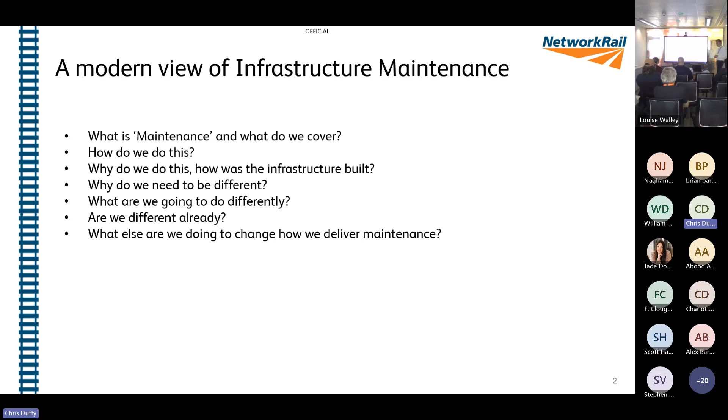So we keep looking forward and saying what we need to do, but let's take a little bit of stock of what it is that we've done already, and what else are we going to do. We've got a really big program of modernising maintenance that's just about to tip over on the 9th of October, and here are just a few principles of that. When I started putting this together, I thought it might be quite useful to talk about where we're at, some of the principles of it, and then come back again in the new year and say what we've actually achieved through modernisation.

So what is maintenance? Maintenance is part of the asset management system. We've got to do a load of things to keep the railway operating - maintenance is a part of it. We've got to do some renewals, but we can't renew everything, we don't have the money to renew everything. So we do some refurbishment - we might change a couple of components, but that can have a massive impact on performance, all the way through to the massive enhancement schemes that change the way we operate the railway. But at the end of the day, for this system to continue to operate, we've got to do some maintenance, and that's something that we look at.

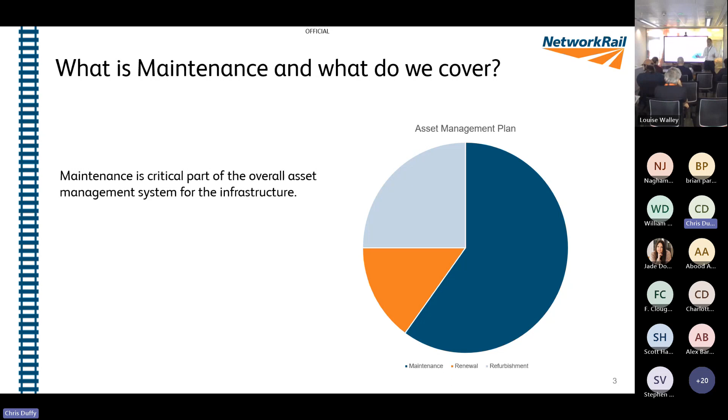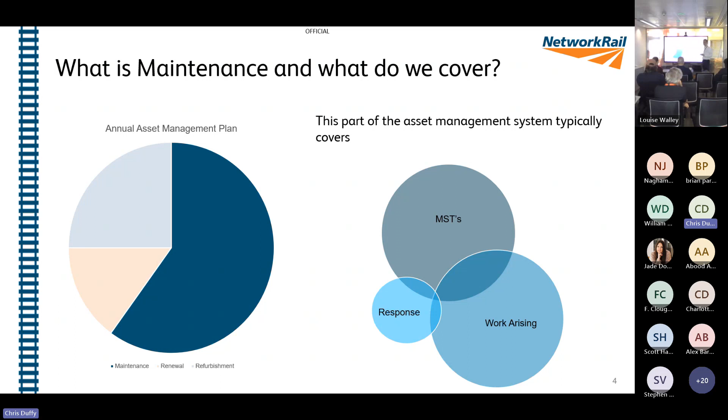So what is maintenance? What do we cover in that maintenance world? As part of that, imagine the maintenance there - we do our MSTs, we do our work arising, and we do our response work. So what are MSTs, I hear you say?

So maintenance schedule tasks - we're mandated to go out and do work on a cyclic frequency that's driven by our standards to say, to get a safe and performing railway, go out and do some work on a cyclic basis. And for all the different disciplines, typically they'll independently say, go out and do this stuff. That contributes about 46% of the work that our direct workforce do. So pretty much half the time we're doing something that's told to us - to get out there, go have a look, go see, go tinker, go clean, go inspect, maybe go change some components. So we do some cyclic replacement, but it's saying on this frequency, go do this stuff.

That stuff that we do will then generate these inspections, generate some work that we might say, actually, we've gone out and done a track patrol, we've done some inspection, and this needs changing. We've got these bolts that are loose - they're always loose, why are they loose? Because they're worn, we're going to go and change those bolts. So we do work arising, and that is then the work that's generated.

It doesn't tell us we have to do it on a specific frequency - these are the things that we find that we think we need to go out there. We will prioritise that, we will fit it into our work banks, and that contributes to just over 40% of the work that we do. So the most significant part of our work is go have a look, and then from that we will have some items that we will plan to change. And disappointingly, 11% of the work that we do is going and fixing faults.

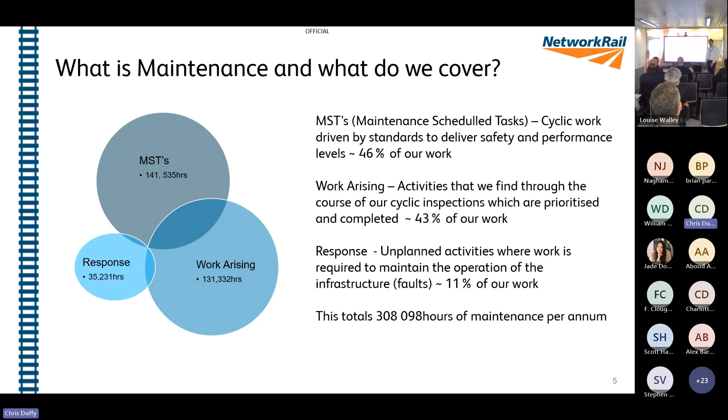So for those of you that aren't from a maintenance background, a little bit of how we do it, getting ourselves into the mind of the section managers, the people who are out there day-to-day planning these works, and the engineers overseeing multiple section managers across that discipline, because we are discipline engineers, we are discipline section managers. So as a former track maintenance engineer, I looked after 3 track section managers, an off-track section, a technical section, rail testing and lubrication, and also welding and grinding.

So what do we need to do? We've covered that with the standards drivers to do our MSTs or the work arising. So we know what we need to do, and we know when we need to do it, and we get a compliance window. So for a task that we would look at doing every year, what happens if we don't do it on day 364? What happens if we do it on day 365, 366, 400? Is it as critical as a task that we should do every 7 or 28 days? We have to do these things more frequently because there's a risk associated with them.

So we know what we need to do. And we have a team of planners who use a system called Ellipse, if anybody's heard of that. That's our work scheduling tool. It's also becoming our master asset register for S&C assets. So we're using this to say what we've got and where we need to go. It's a great tool when we use it effectively.

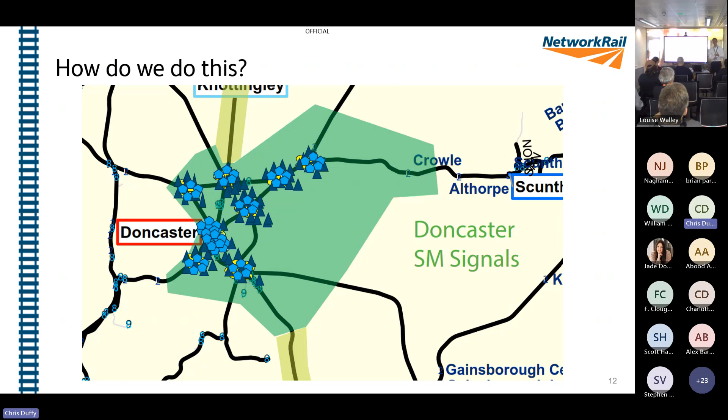And then you think about it - what is the access? How do we do this? This is what we're moving towards with our signal box special instructions, where you can only get in certain places at certain times. If you look at the colours here and here, you can get on the fasts at one time and on the slows at another. So we've now got not just planning by geography - even the line at that place where we're going, we can't get all of it. If we're doing a crossover, we might get on one end of it, but we can't get on the other end because there's trains running on there, and that isn't covered in our signal box special instruction.

So you get to a point now where, with a really heavily congested railway, with the work we need to do - the 308,000 hours of MSTs, work arising, and faults we need to do - because this is all a plan, when your 11% of faults come in, that goes out the window, and you've now got to somehow recover it in one of these access windows with all the other things laid up. It starts to be quite a complex task that the maintenance teams are undertaking. That was just the section manager signalling at Doncaster. We've got 39 section managers on East Coast route who are every day having these thoughts and trying to work out how am I going to deliver this?

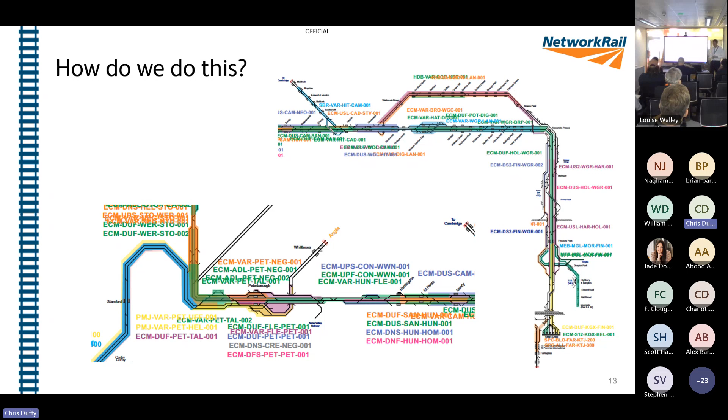So you'll agree? We want to be looking at doing something different, don't we? So have we changed? When I left, remote condition monitoring - as we move into a digital age, and we don't know how long we've been in a digital age, how long have we described ourselves as being in a digital age?

But we've got radar. Anyone in the room know what radar stands for? Anyone remember what the acronym of radar is? Can you, Dan? No, I can't. No, it's got an acronym. I can't remember.

But this is a way that we saw this when we had the presentation for Keadby. Actually, if we can start to instrument our infrastructure in some way, we can start to remove some of these activities, and it's going to tell us what's going on.

We go back to 2019 because things haven't really changed that much. So point heaters, we can see the state of our point heaters if they're turned on or off. Instead of having to go out regularly to check, have they turned themselves on by mistake, or has someone done something to turn them on?

We can start to get alarms that say some of your point heaters are on. That's not good for hot weather management. In winter, if your point heaters are not on, that's not good for running trains on cold mornings.

So it can start to alert us to failures we've got, so we can plan a bit more. If we get an alert at 3 o'clock in the afternoon about some point heaters not working, actually I don't really care right now, I'll go in tonight because it's going to get cold a bit later. We can plan to go in and respond, rather than finding out at 3 o'clock in the morning when the signal tries to swing the points and they aren't working, putting us in a much more reactive position.

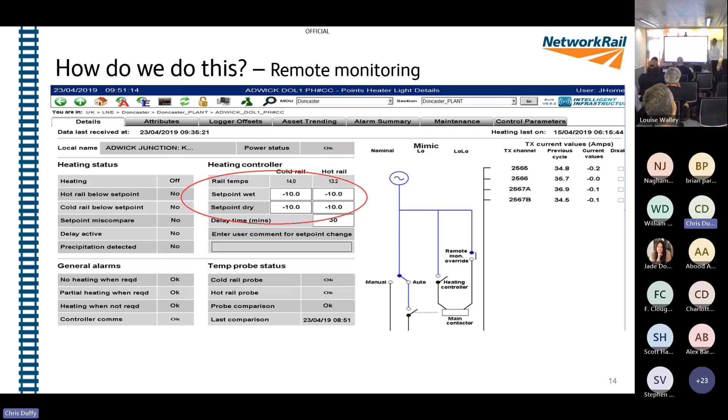So we can start to instrument things, and this is us moving forward. That's a winter example. What about in summer?

Again, remote condition monitoring - how hot is the rail out there? We know how hot the point ends are because we've got probes on them. So what about using that information to find out how hot the track is in summer? We use this technology in winter to know our point heating is working and the temperatures when it'll come on and off. What about using this for more than one area, thinking about rail temperatures?

You can see here someone in July was thinking about rail temperature - great, we've got some red flags. We can set these alerts based on the different critical rail temperatures we've got, because of the asset condition work we've done, and it can start to drive us to respond because the infrastructure is now talking to us. So that's a bit of what we do.

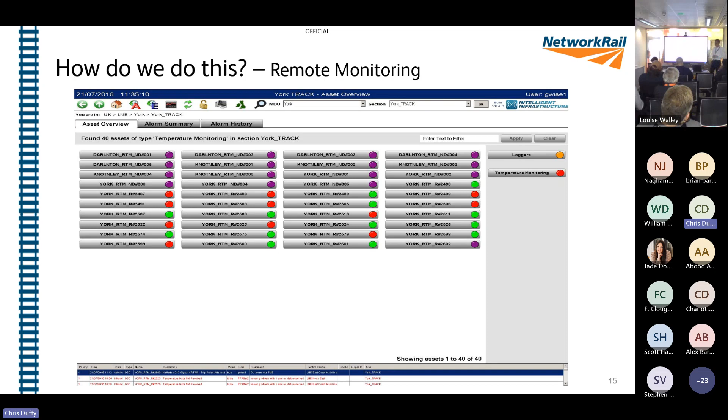Some thoughts from when I left maintenance on what we were looking forward to with a more modern approach. Why do we do maintenance? Why do we do some of it? Hartley Curve up on the Northumberland line - I was involved in the enhancement, and as an ex-maintainer going into an enhancement scheme, I sit and think, why are we doing this? What can we do to make the life of that track section manager easier? And Hartley Curve pops up.

It's got a 198.4 metre radius. There's nothing we can do to design out the curvature here so that we can make this CWR, because being joined track, we need to patrol that every 2 weeks due to the risk of fish plates breaking. If it was CWR, the LPR could go up and down here. So actually we're often constrained quite often by what was built in the first instance.

That's driving us that we have to do something - we can't embrace some of the additional technologies we've brought. So we are in some ways constrained.

Makes it even more fun because there's a level crossing in the middle of this 198.4 metre radius curve. That makes it really difficult to maintain the level crossing, really difficult to maintain the alignment through that curve, and really difficult for it to be safe because of the skew we've got and cyclists, and all the good things cyclists like to do.

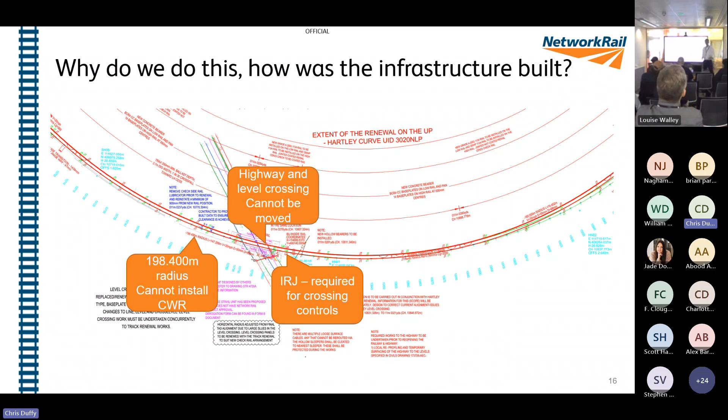And so now through the enhancement scheme, we can start to think about helping out that maintenance team and where these are positioned and what we're doing. So there are times where through an enhancement scheme or a renewal, how much of the future maintainability are we really thinking about? I'll just share this example with you.

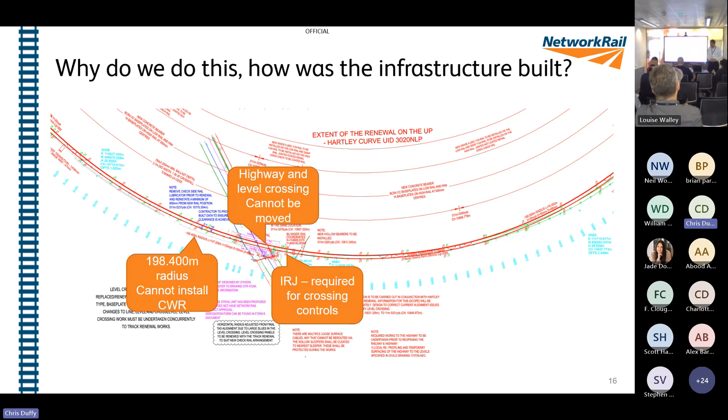What does it mean? Do not cross if trains are running. Our safe systems work: if we're going to be within 1.25 metres of an open line, we need protection. The only way we can maintain this infrastructure is when no trains are running.

So if one of our telecoms friends wants to just go and open it up and check that the lights are still flashing and see it's not too hot, great. We'll have to wait till Saturday night to go and do that. Or where else do they need to be on Saturday night? Is there anything else more critical that could be doing?

So how we build the infrastructure really can make a fundamental difference to that complex portfolio of relatively simple tasks. So it's one location case - you've got to go to one location case on Saturday night. You layer that up with what that section manager is dealing with and what they've got to plan elsewhere. And actually it is now becoming quite a burden, some of these points that we've made.

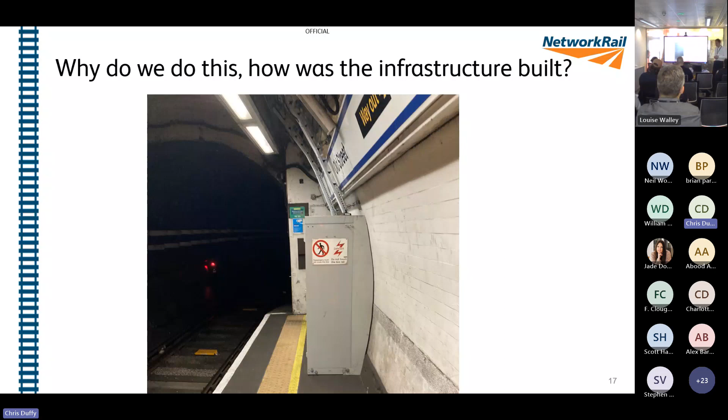So this is East Coast Digital. They're not all bad - not all bad. So as part of their work, what are they thinking about how maintainable the infrastructure is?

So they've assessed they've got 161 locations as a part of their scheme that they've got to work on. And without any improvement works, 130 of them would be all right. We don't need to cross the line to go and do some maintenance. These are maintainable - we don't need to stop trains, go across.

There's 31 that would require one or more lines to be crossed. So actually that's not that maintainable, because if you want to go and look at something whilst trains are running, you can't look at 31 of them because you can't get to it to physically do it.

But as a scheme, by doing some improvement works, 26 of them you don't need to cross the line to anymore, because they put in 9 new access points and 1 new safe walking route. And now there are only 5 of the 31 that need crossing the line.

So as a part of that scheme, it's looking at additional scope that thinks about that future maintainability. It's thinking about the end user. It's thinking about that complex portfolio of relatively simple tasks.

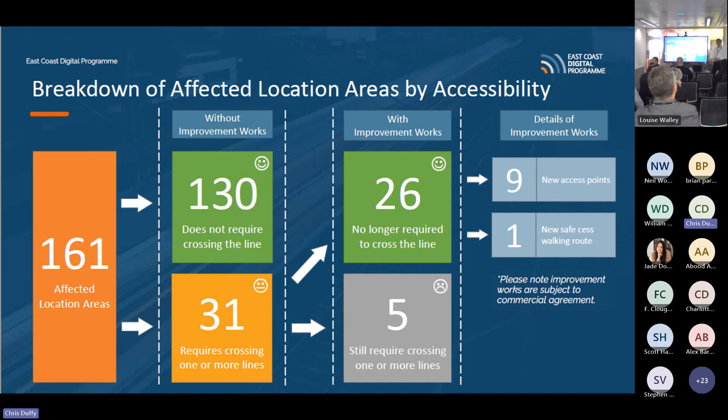Okay, so why do we need to be different?

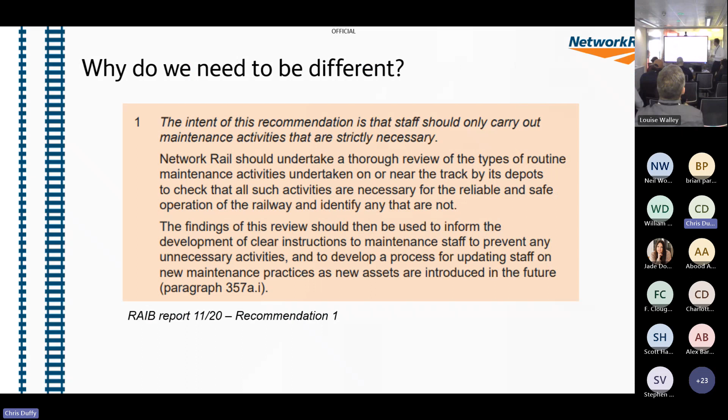July 3rd, 2019, Gareth and Spike were killed at Margam. They were doing an activity that, when we looked at it, the RAIB report said we didn't need to do that. We've got people out there undertaking an activity that they probably didn't need to do.

We've got 141,000 hours of MSTs that tell us to go out there and do work. We do 131,000 hours of work arising that somebody's prioritised - that probably we didn't need to do in this instance. We had people out there on the operational infrastructure exposing themselves to risk that the system didn't need to mitigate. And I think that that's a really good reason for us to think about doing something different.

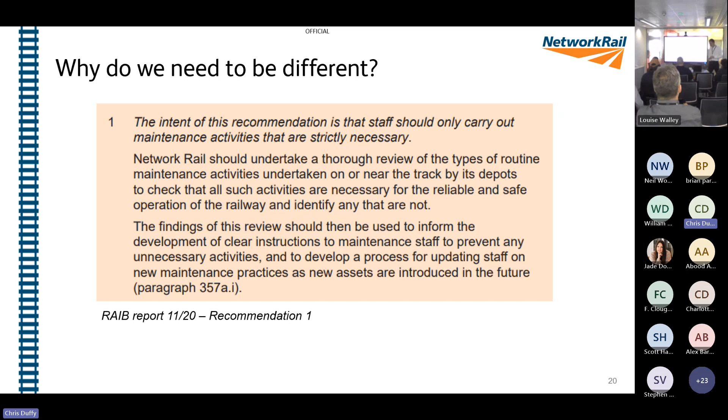Sadly, it's not the only reason. In February 2021, at Surbiton, a track patroller was struck and fatally killed.

Track inspection is really important, but is it open line working? They were inspecting 80-mile-an-hour infrastructure with lookouts, and someone was struck and killed. Was that the only time that they could have done that activity?

Planning that one track patrol, you can do that on Saturday night. You fit that one track patrol into that complex portfolio, and actually maybe now Wednesday does become the only time you can do it. So 2 really recent examples of why I think we've got to be doing everything we can to look at a different way of doing maintenance.

That's looking back. If we look forward, again, we've got to do things differently. We've got our decarbonisation targets to meet.

Going out and driving 100 miles to go and look at something and clean it and such and such, it's not a particularly positive impact on the railway. And even if we do move to electric vehicles and we make a dent in the 33.5 million quid that we spend on fuel every year, do we need to be there?

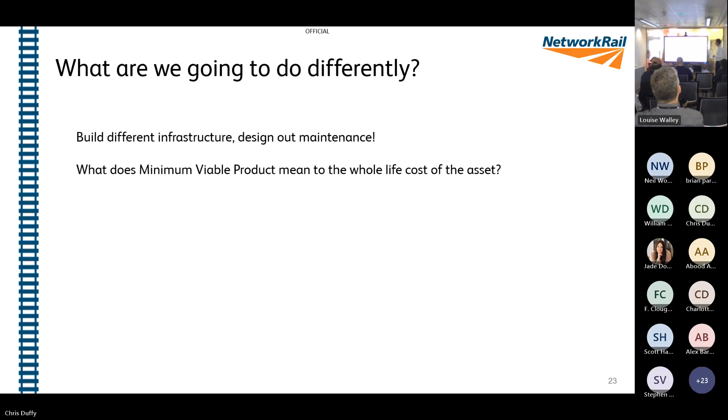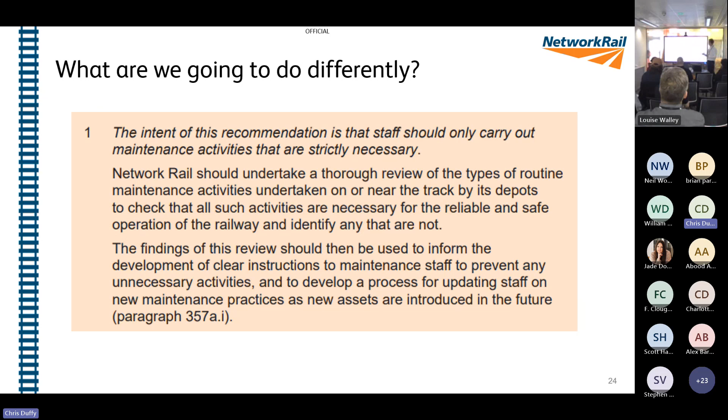So again, what we're going to do differently - I'll make no apologies for sharing this, remember it from earlier, recommendation 1 from Margam. Are you doing work that is unnecessary? Are we exposing our people to unnecessary risk that the system doesn't see a benefit from?

Looking at reliability centered maintenance - thinking about how the asset performs, how do we want it to perform? What do we want it to do, and the tolerances? If it fails, what's going to happen? Does it fail safe? Is there a risk? What's going to cause it to fail? What happens if it does fail in this way? Does it matter if it fails?

A load of things that the principles of reliability centered maintenance we're adopting in the railway - how pure we are, not entirely sure. But for that section manager that's got that complex portfolio of tasks to think about, actually, they don't care how pure it is. Is my asset going to perform? How much work do I need to do? How many faults am I going to get at the end of it? It's really going to help us to do things differently.

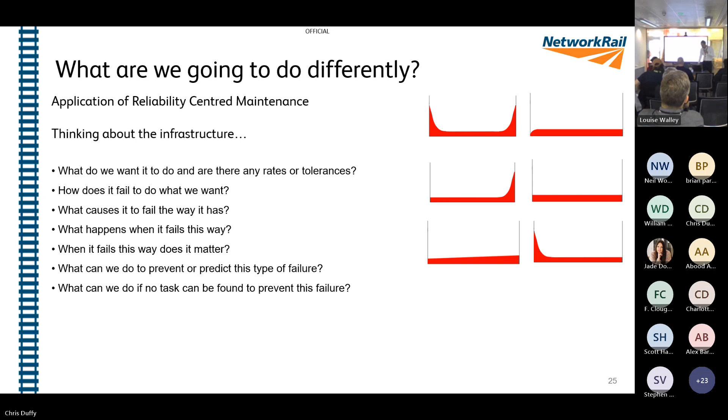So what could that mean? Bring it back to a track example. For a timber layout, we will go and inspect that every 7 days. For a fully welded concrete layout with shallow depth switches, we'll go and inspect that every 14 days. So we're sending people out there, S&C, high risk asset - we're going out and looking at it probably every 7 to 14 days.

We also go out - as we call these, our level 1 inspections, our basic visual inspections. We have supervisors who will patrol that same S&C. They'll go there every 8 to 13 weeks, and they'll be looking at slightly different things. They're not just looking at, are the bolts intact? Are there any loose clips? Is there anything else going on that's an immediate risk to safe running of trains? They're looking at a slightly broader horizon.

How well are the patrollers doing it? Are there any repeat faults? What could be happening over the next 26 to 52 weeks? Have I got any risk of things like flange back contact? Have I got any damage to the switch blades that could be a derailment risk? So they've got a different lens that they're looking at.

So you put those together, we're going to these places every fortnight, someone else goes there at another time. So what could a risk-based maintenance regime look like for track? Well actually, we could be going to things between 13 and 104 weeks. And this really is going back to those thoughts that we had about what's going to fail, how could it fail, what happens if it fails.

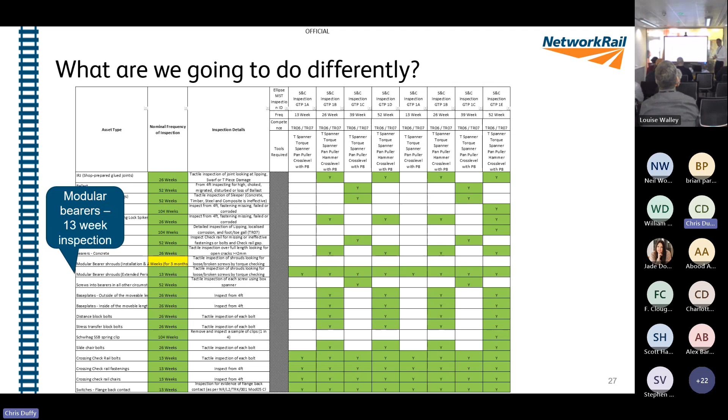So just thinking about that, every decision we make in a sponsor, in a planning, delivery, design world, can have an impact. Going and looking at a bearer shroud, every 13 weeks I can plan that. Layer that in with the complex portfolio of all the other tasks we've got to do, and actually we're now adding to that burden, section manager.

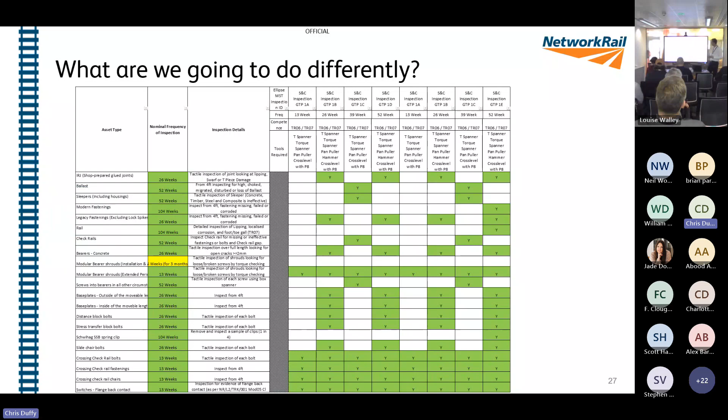Going to do something differently on plain line. So again, what does that mean? We've got shop glued IRJs. These are glued, hook bolted. You have bolts that can come loose. It's a different construction technique, they have a different failure mechanism. Through our RBM principles, we go look at them every 26 weeks.

But if we install a dry IRJ, or we leave them in because we're an enhancement scheme that's looked at minimum viable products, for someone to come and implement a risk-based maintenance regime, we've now introduced this activity, which is fine because we're here doing some other things. But if we could design out these other things, then actually this could be the limiting factor. So whilst we're there anyway doing it, it's fine.

We've got to go to site. We've got to go look at the switches for flange back contact. We've got to go do the crossing check rail fastenings. It's fine, we can just look at the bearer shrouds. But if we can mitigate the other points, well actually this now becomes a burden and it's driving us to go there. So why do we need to be different?

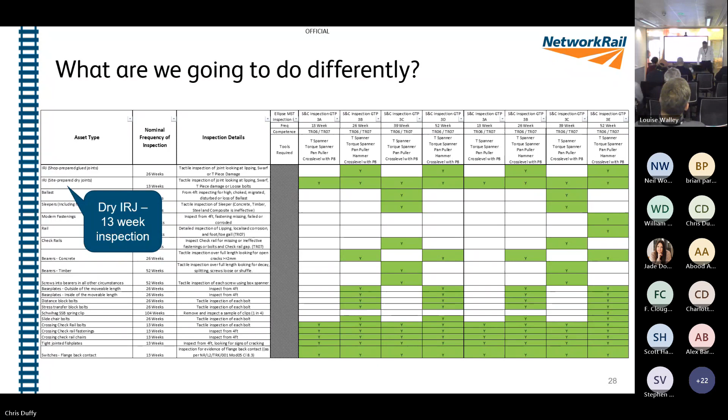Make no apologies again, coming back to it. Last few years we've had people out there doing work at times, but it's essential work. But there's a different way of doing it, but the different way maybe didn't fit into that complex portfolio. So we really do need to think different. So what's it going to take to think different? It takes a bit of engineering, a bit of innovation.

So we've got one of our E&P maintenance engineers who has looked at this and said, we call it a BO1, non-intrusive ground level visual inspection. We go with shine a torch and we look at it. But we don't just do that, because we're going and looking at the integrity of the overhead line system, and it's not just overhead - you've got your structure to rail bonds as well.

We have them every 60 meters or so on both lines, both sides of the track, on a 4-track section, all the way across. We might only be able to get the fast lines, not the slows, because of our signal box special instructions. How do we inspect the fastening on the main line and the one at the structure as well? Because it's a structure to rail bond, it's all bolted - we need to torque if required.

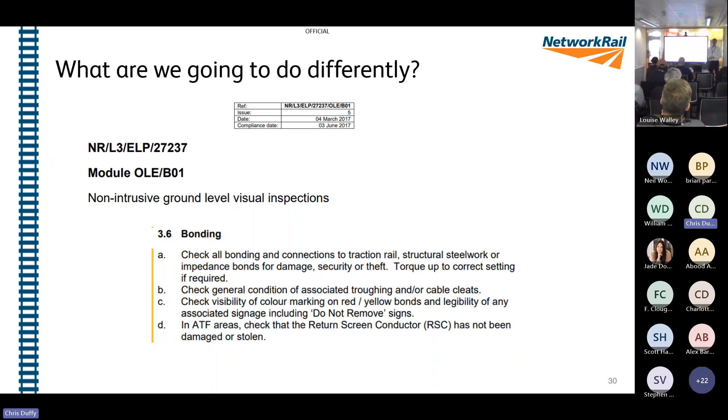How do we do that? We probably don't, being honest. We'll go along and kick it. I haven't seen any OLE engineers with a torque wrench - like I say, holding the torch, looking up. So we've got to do something different.

So, Jing Yu, you want us to get in this photo? It's Facebook, there's a Yammer post. So what's this? This is a pin brazing machine.

So instead of drilling the rail, putting a bolt through, top, fixing the structure to rail bond to it - and now we've got a fixing that could come loose - actually, let's give this a whirl.

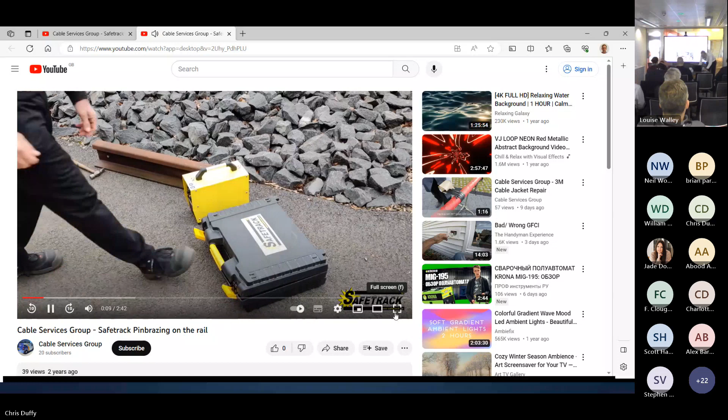Okay, pin brazing machine, so we do. It's not sharing that, is it? You were right, technology - shouldn't have gone for the video, should I? Got a hand from Joe.

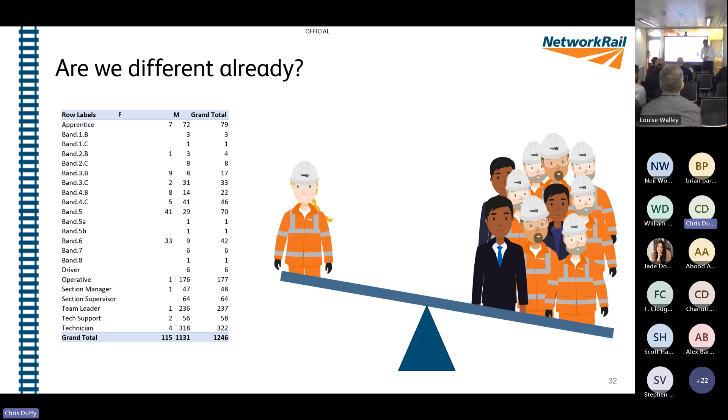But are we different already? 308,000 hours of work - if you go back to January 2022, this has got some other grades added in, but we were doing around 225,000 hours of work in our MSTs. So we've done some stuff, we've taken some work out, and actually we're down at about 193,000 hours. So the risk-based maintenance, the changes to standards - are we doing things that we don't need to do? Absolutely.

Less of it - still going to be doing some of it, but we are on a journey where we are already different. If this were wound back to 2010 - I don't know when Rose came in for signalling - but we think about the progress we've made. In some other disciplines, the track example I gave of going to look every 13 or 104 weeks - that's really the first example of RBM I've seen in a formal world. Dan and I did some stuff when we were at Doncaster, looking at what's the difference at Grantham South Junction, why can't we inspect that in a different way. But that was a one-off 10 years ago and made very little difference. Now we're making progress - we are getting different.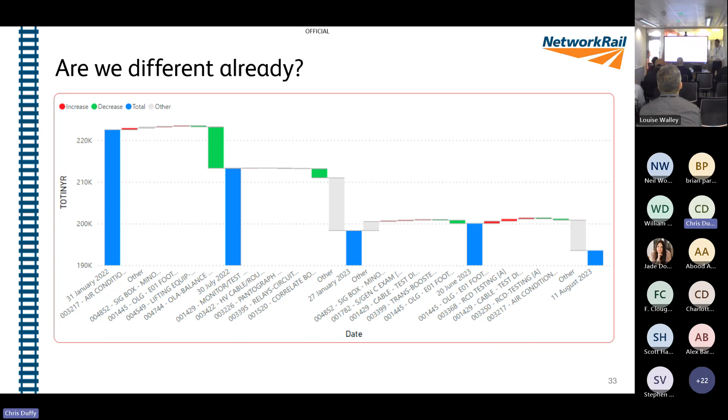So some of the other things we've got - are we still stuck in 2016? Are we still thinking about that screen? Actually, no - we've got some really different types of rail temperature monitors. We've got Yeltex, we've got much more visual dashboards, we've got Hitachi.

Has anyone seen RAVE? Anyone heard of RAVE? So, unattended geometry measurement systems - the Hitachi fleet, I think most of the TPE, some of the LNER, can measure track geometry. So we've got the NMT, the PLPR 1 and 2 that run around on specific paths, get in the way of everything, get wrong-routed because there's other right-time stuff we're trying to manage. Well, actually, we've got trains running up and down the network that can measure it.

It's unverified data. Nobody's gone through and checked it for positionality, for rogue data sets. Was the sun shining from the east that morning and did it have a problem with the lasers, like we get with the NMT? Well, no, it doesn't.

But for this area here, we can compare this to the last trace, and we can compare it to the trace before. If this is running every 3 hours on a TPE north of York, how many times is it going to be wrong? They're either all wrong, one's wrong, there's a rogue one. We can start to see the difference in it, and now we get a rough ride.

The first thing I hear is, oh, I've got a rough ride, has anyone had a rave on it? I'm like, well, that doesn't sound like a good thing, but we've got a system now. We can dial in, we can see what did the last train through see, what did a train 2 weeks ago see, not what did our trace last month see.

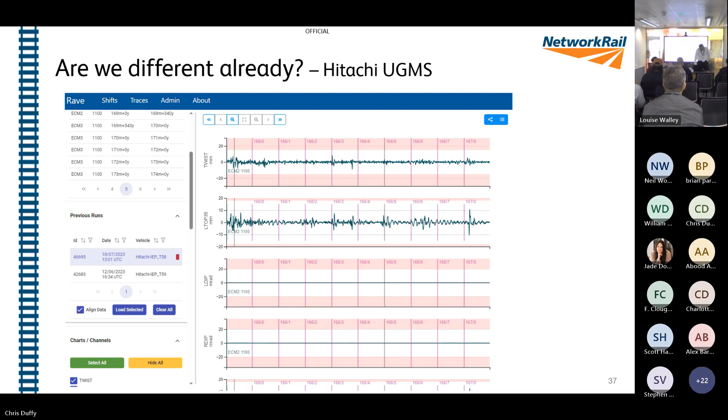So we're starting to partner with industry and think about who's running, survey once, use many. We've got that path being used. What else can we collect from it? We've got the NMT running up and down. People talk. So can we use the technology that's out there in a different way to help inform some of the maintenance that we're doing? A lot of opportunity in that space.

So what else are we doing? Modernising maintenance. We talked about MSTs, we talked about work horizon, we talked about response. These things we can do to manage what the work is. But if you're still telling us we need to do it, we've got to go think about the how.

So 9th of October, we're going to go live with modernising maintenance. We're going to introduce changes. We're going to start to roster people individually, not as teams. Doesn't sound a big thing, but can make a really big difference for us. We're going to start working cooperatively.

We're not going to be signalling, track, overhead line - well, we still will be, but if we're out on site and we've got a job to do, I use the example of a rail drill, my favourite. Overheads currently, until Jingu gets the pin brazing in place, will go and drill a rail for a structure to rail bond. P-way will go and drill a rail for a fish bolt. Signalling will go and drill a rail for tail cables.

What's the difference? It's the same drill, it's the same course, it has a different bit, you do it in a different place. So what do you need to know that's different? You're competent. Where to drill the hole, what size bit to use. So if I ask Dan what size bit and where do I drill it, I'll go and do it. And when I need a hole drilling, Dan, it needs to be this big and it needs to be there. So we're all competent, we've got capability to drill a rail.

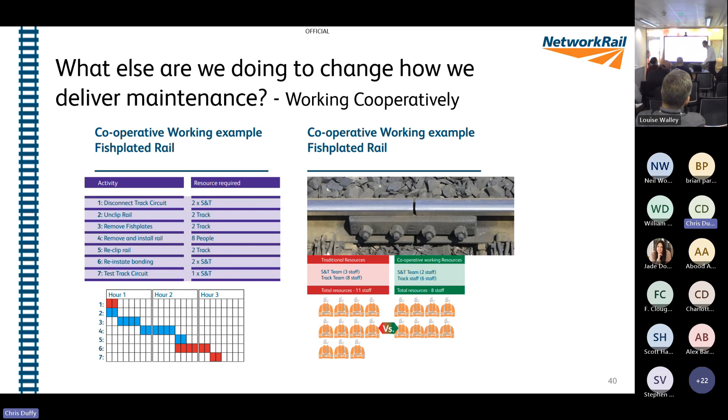And then looking forward, joint response teams. So instead of just having the S&T, if there's an S&T fault, they'll go and look at it and say point failure. Why is the points failed? It's voiding. Let's call the P-way. And the P-way go, well, I can't get there till Saturday night because I've got a complex portfolio of simple tasks.

There's a line blockage, and there's a signal box special instruction register, and I can't get in on the fast until that point. So I'll come back on Saturday night and I'll remove that voiding. And today's Thursday and tomorrow's Friday, and those points fail again tomorrow.

And the S&T are not doing that planned MSTs, they're going and responding to the faults. That means all of their tasks that they had planned have gone out the window. They've got to catch up. They've got to look for the next SBSI access window. They've got to look for where the next people are.

We had a P-way person there who went, yeah, it's voiding, let's just take that voiding out. It might be that we still have to go on Saturday night and lift and pack and do some more remedial work. But have we managed that failure? So if we had a P-way person there who'd turn around and say, we're going to take the voiding out. S&T, root cause of this failure is voiding. Can you help me to take the voiding out on these points, please?

And that means that we're going to deliver asset performance. We're going to reduce our service affecting failures. We're going to deliver a safe, efficient and reliable railway. We're not going to be called out. We're not going to be chasing the maintenance that we need to do. Is that reasonable?

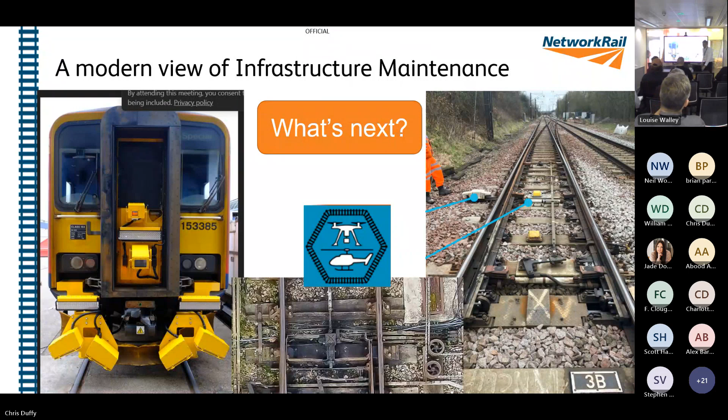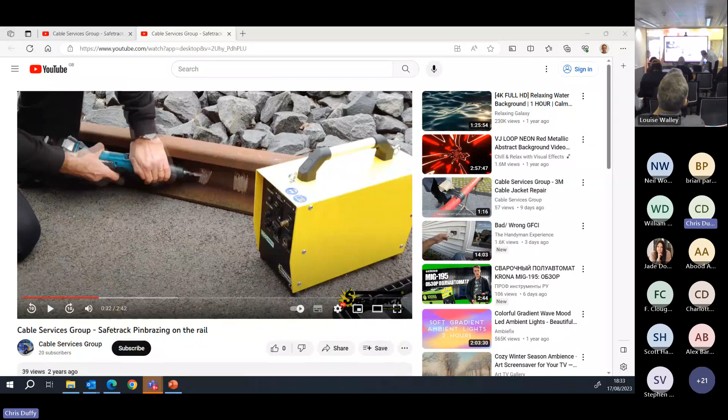And how do we change it? There's some of the things that we have to do, we just have to do it. So we don't do open line working in the same way. There was just a really hard line of, right, enough's enough.

I've heard Andrew Haines talk about sitting with Tyler's family and them saying, why do you just not ban it? Some things we have to be really draconian on. Some things we can bring people along with.

I remember the introduction of hard hats, all orange. We go through these cycles and it's a really tough learning curve in the short term. The sustainability part of it is the challenge, but it does generally plateau and people start to, this just becomes the way. I really believe our apprentices is a way that we need to start conditioning our future organisation.

So this year, our latest intake have all gone through first aid for electrical accidents, because if we're going to work as multidisciplinary teams, let's start getting people thinking about working cooperatively. If we're supporting our overheads team to take an isolation and apply earths, we need someone with first aid for electrical accidents. Let's just train people. So from the day you come into the industry, we're starting to build that. I really believe that's a slow burn, but a really important one with the apprentices.

We'll have some change champions that we know, and there's times where people just say, no, you're not the team to start with yet. Let's go somewhere else and prove it works. Let's focus our energy at times where I really do want to come to you, but I don't have the energy to do that. Let's bank the success where we can. So we've got to take it, I'd suggest, in a few different ways.